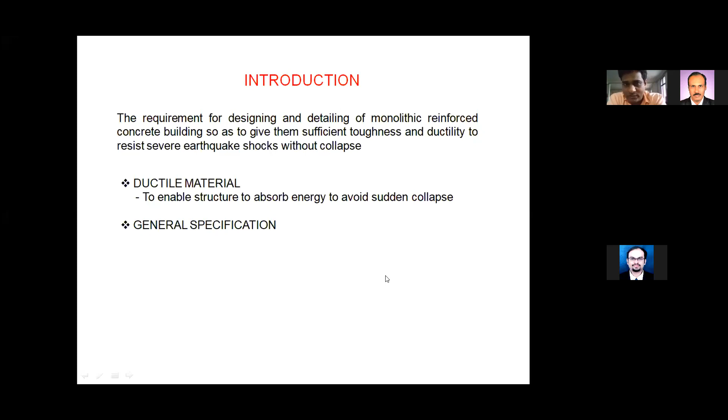Okay, so I will start now. So we have the general specifications that we use. For that we use IS 456 for the construction of RCC structures. Now we are moving to RCC structures which are subjected to earthquake load, seismic load, and wind loads. Hence IS 1893 deals with seismic forces and its effect and general guidelines for seismic provisions.

Why do we need the seismic codes? The requirement for designing these RC structures is to give them sufficient toughness and ductility to resist severe earthquake shocks without collapse. Because we are developing a structure which should resist the earthquake forces without collapse and which should sustain the forces and its impact. We have the materials in use for general construction.

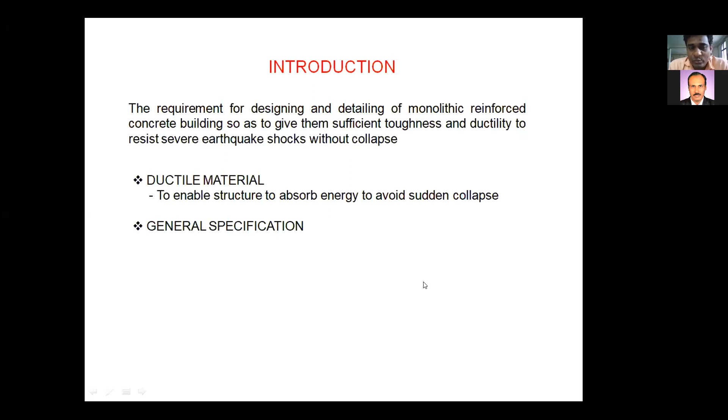We have concrete and steel. Concrete is sufficient to take the compressive forces, but it is a brittle material, and hence we use steel, that is the reinforcement, which is called a ductile material. So for tension we use steel, for compression we use concrete, and even for shear stresses, shear forces, to account for shear we use shear reinforcement. So all this plays a major role in ductile detailing, that is for the earthquake provisions.

Talking about IS 1893 revisions, the first IS 1893 was put forth in 1962, and IS 1893 gives the recommendations for the earthquake resistant design of structures. The first revision was made in 1966. The second revision of IS 1893 was in 1970, with some modifications and small changes made from the 1960s to 1970s IS code.

The third revision of this IS code was brought up in 1975, and the fourth revision, which we use for a longer duration, was in 1984. After 1984, the fifth revision was in 2002, based on some specific guidelines. The IS code, which was only one book from 1966 up to 1984, was then converted into 5 parts.

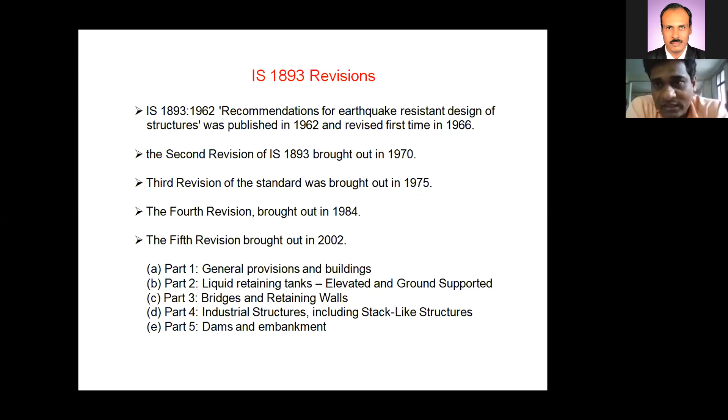This is for the general provisions, and it is applicable for building frames with 5% damping. IS 1893 mostly deals with RCC construction, but the 2016 IS code gives some guidelines for steel also, by considering a different damping ratio.

We know about earthquakes, we have heard about the Richter scale. The magnitude and intensity of an earthquake can be measured and defined by various scales. Out of these, there are minor earthquakes with less intensity, moderate earthquakes, and large earthquakes.

Minor earthquakes happen many times, but we do not feel the shaking. In moderate earthquakes, we can feel the shaking of the ground without structural damage occurring, and moderate earthquakes occur a number of times in the lifespan of the structure.

We know the general lifespan of a structure. For buildings, it is some 50 to 100 years. For dams, retaining walls, and bridges, it has the lifespan as specified by the codes. Some ancient bridges even last 150 to 200 years, while some RCC bridges last only 70 years, 50 years, and some collapse within 20 years.

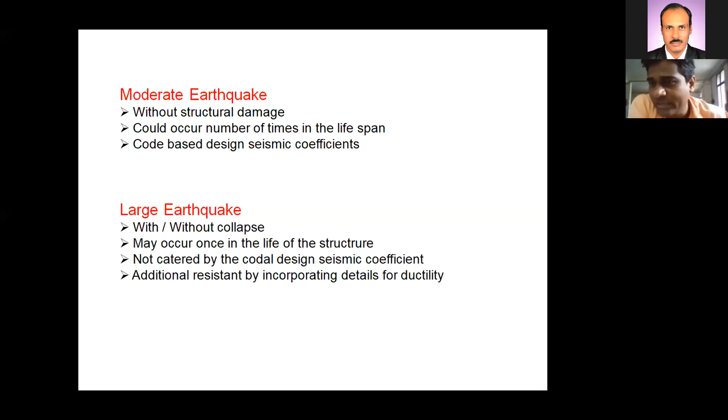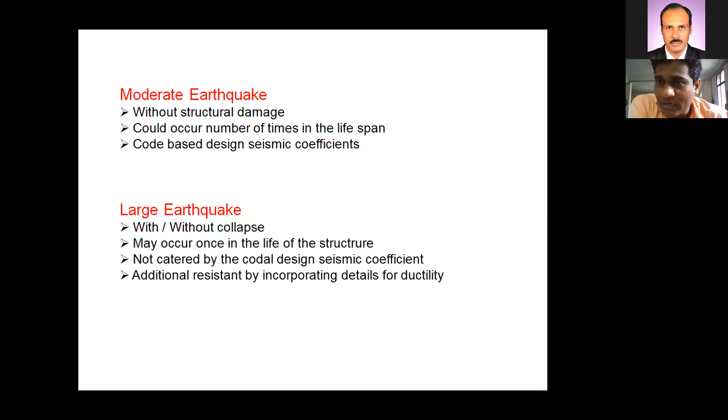Code-based design consists of seismic coefficients which are used for calculation of forces and reinforcement details. If we consider a large earthquake, it can cause structures to collapse or remain standing but with severe damage, whereas a moderate earthquake has less damage but a large earthquake can cause severe damage to structures.

A large earthquake occurs once in the life of a structure, not always. Large earthquakes are not catered for by codal provisions or seismic coefficients in design; instead, additional resistance is given through detailing for ductility as provided by the seismic codes. So we will have to consider moderate and large earthquakes for designing our regular structures, which include buildings, bridges, water tanks, retaining walls, etc.

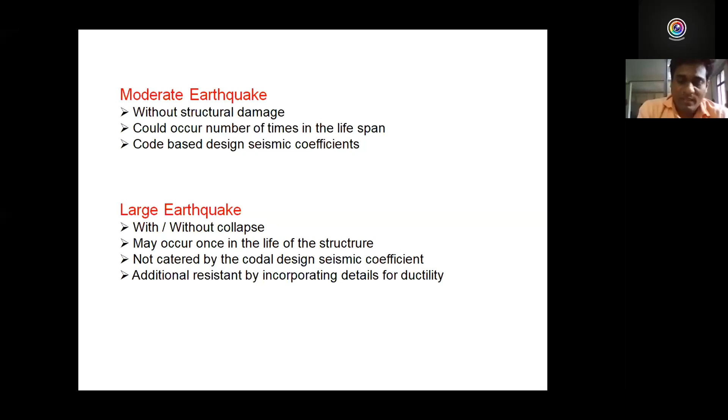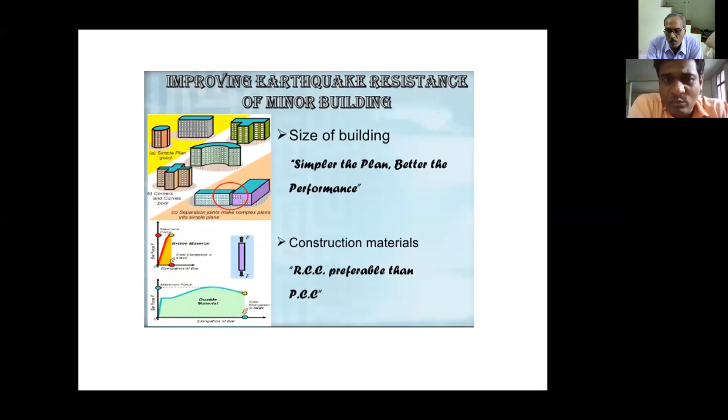While going for the construction of structures, we always prefer the simpler the plan, the better the performance. We go for regular, symmetric structures and avoid unsymmetrical structures due to torsional effects and eccentricity. To counterbalance excessive forces and moments, we go for a simpler plan for buildings. The figure shows some buildings with irregular shapes and some with regular shapes. We use two materials for construction: RCC, PCC, and steel.

What if the beams are strong and columns are weak? If beams are strong, they take the load from the slab and, having greater depth, the self weight of the beam increases, transferring this load to the column as a reaction. If columns are weak, the reaction coming from the beam will not be sustained by the column, leading to failure in compression and sometimes shear. Hence, a weak column is not preferred.

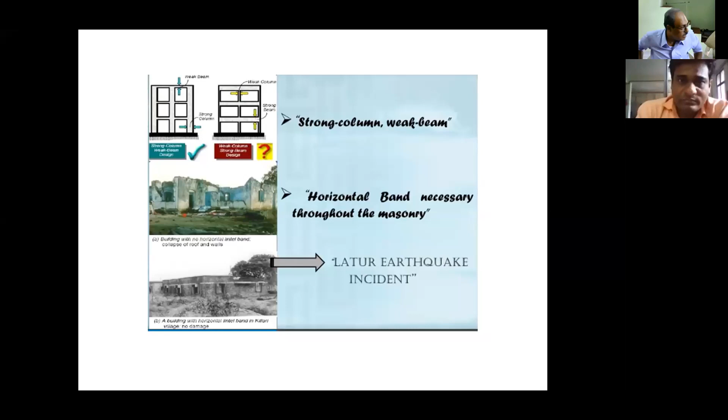In the Bhuj earthquake, the soft story effect was observed, and hence the codal provisions were made in terms of soft story and weak story. Specific definitions for soft story and weak story were given in the IS code, and again in IS 2016 rather than 2002, the definitions of soft story and weak story were slightly changed, which we will discuss.

Provision of shear walls along the periphery, along the direction of earthquake forces, are prepared. These are used to counterbalance the effect and provide greater stiffness to the wall. These shear walls are deep beam reinforced walls, and they are to be provided along the periphery, along the symmetrical part of the building, along different axes.

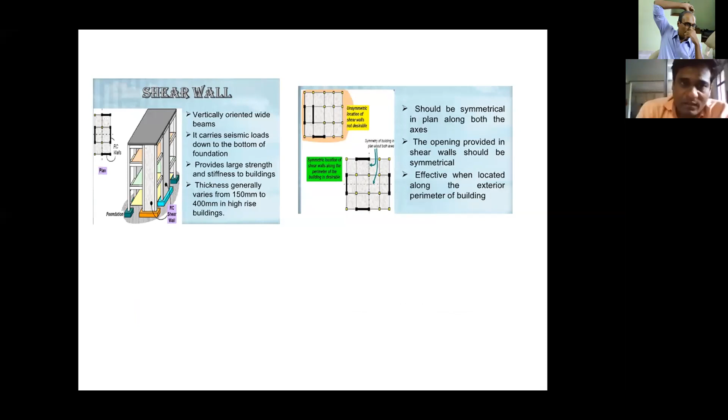Base isolation is one of the techniques to counteract earthquake forces. It introduces flexibility in the structure to counterbalance the impact, shocks, and vibrations. These are some figures which give us a clue for going for different seismic codal provisions and to use different devices. Base isolation is one of these devices.

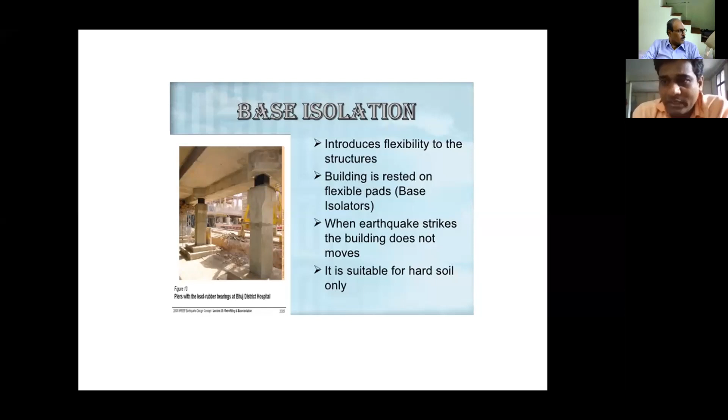Again, there are some dampers. Dampers are used to absorb shock, so they're called shock absorbers. Dampers are of various types: viscous dampers, friction dampers, yielding dampers, and viscoelastic dampers. Depending on the type, there are also lead rubber dampers.

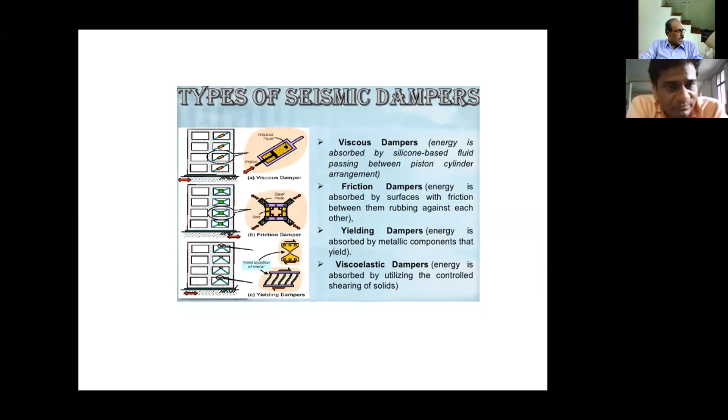So all this was the basic background to go for the detailing. Now we have the members: flexure members, and members which act for shear. We have the beam as a flexure member and the column as the compression member. Beam and column comprise the structural frame, so combination of beams and columns in a proper arrangement leads to the structure, which is the building frame.

For designing the frame, we use the member as a flexure member for the beams. Why is it called a flexure member? Because it carries the bending moment. The beam is in flexure at the center where the maximum load occurs, and at the support it is to be designed for shear.

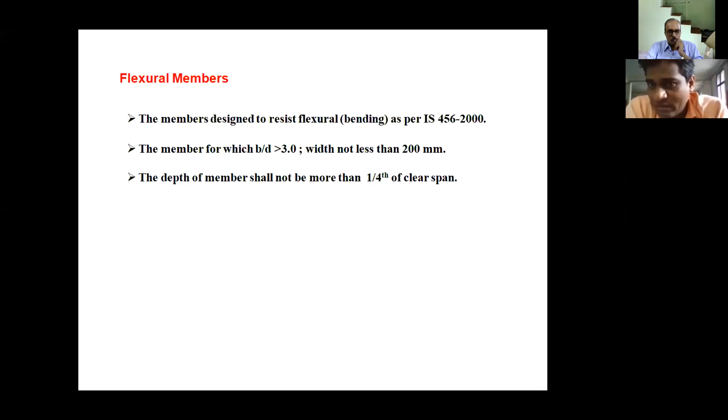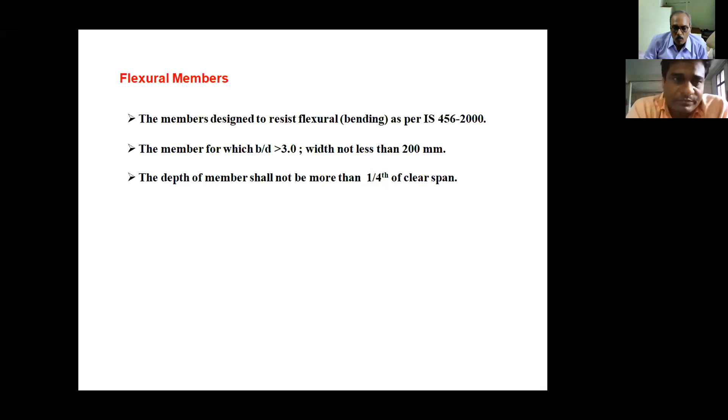The bending or flexure members are to be designed as per IS 456, but detailed detailing is to be carried out as per the codes of the earthquake, that is the special confined reinforcement. For members where the width to depth ratio is greater than 3 and width not less than 200mm, the width and depth criteria for the beam are also revised. It should not be less than 200mm or the thickness of the wall, and the depth of the member shall not be more than 1/4 of the clear span for the flexure member.

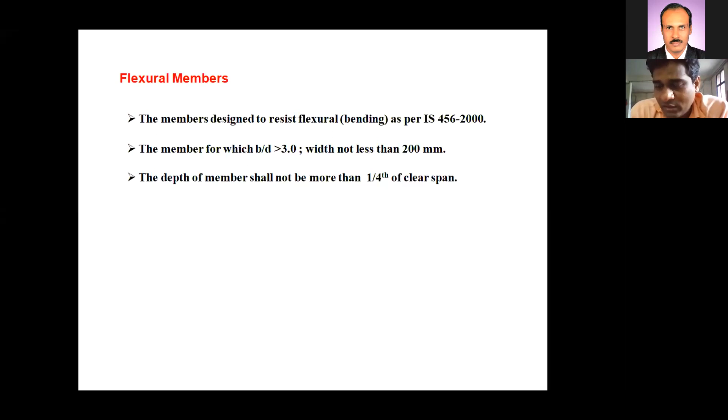And hence it again gives the deep beam criteria for small depth. We have the reinforcements which are called longitudinal reinforcement and stirrups for shear.

For longitudinal reinforcement, these are used for resisting bending cracks. The top and bottom reinforcement shall consist of at least 2 bars throughout the member length, and it depends on the moment and shear how many bars are to be provided along the longitudinal direction, that is the longitudinal reinforcement.

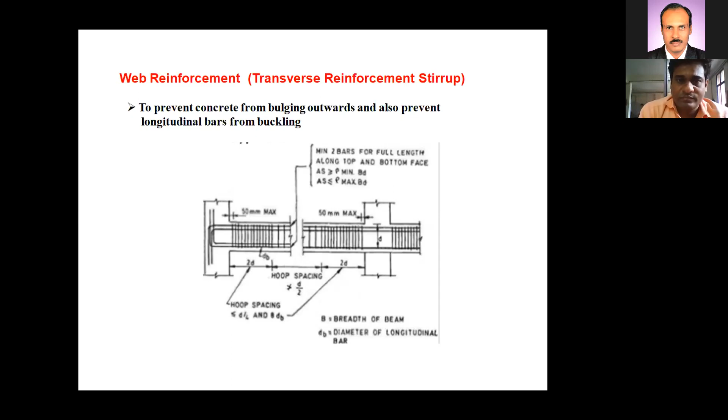Transverse reinforcement for another type of structure - beam column joints. The development lengths are shown here. At the center of the column, confinement of reinforcement is to be provided at some distance. At the junction of beam column, confinement of reinforcement is provided, and the reinforcement spacing increases as we go away from the beam column junction.

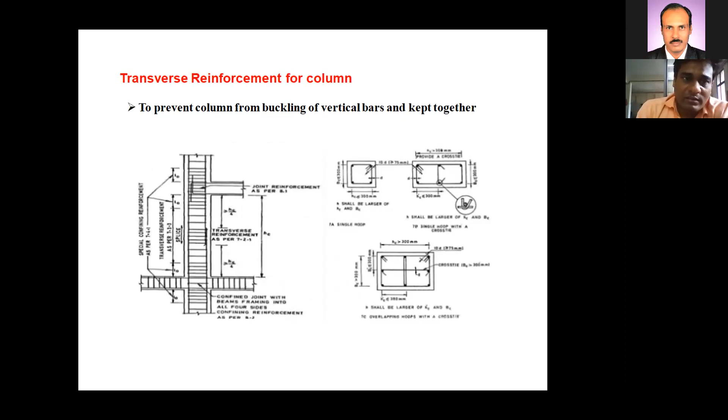Now specifically given by IS 1893. In conjunction with IS 1893, I will talk about some codal provisions of 13920 also to understand, because both are specific codes and both have a correlation in terms of the confinement of reinforcement.

The minimum dimension of the column shall not be less than 20 times DB, where DB is the diameter of the largest longitudinal reinforcement in the beam, or it should be 300 mm. So we are not allowed to go less than 300 mm for the dimension of the column.

Minimum column width should be greater than or equal to 300 mm, or it should be greater than or equal to 20 times the diameter of the bar. If we are using a bar of 20 mm diameter, 20 into 20. If we are using a 16 mm diameter bar, 20 into 16.

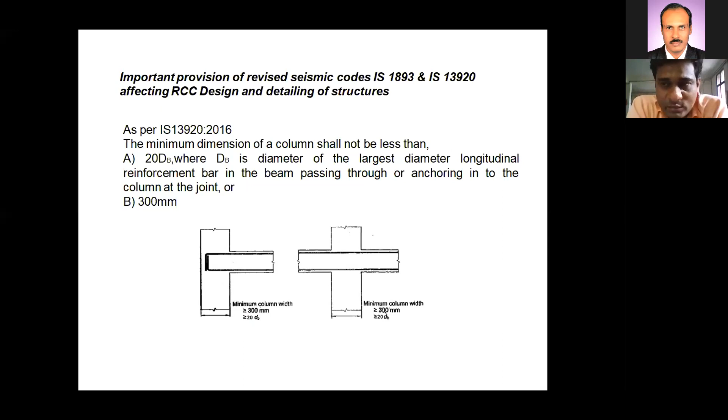So the dimension of the column, as per the rule, is 20 times the diameter or 300 mm, whichever is greater.

As per IS 13920 also, the calculation of shear force capacity should not consider the contribution of bent up bars, links, and the concrete RC section separately, but the calculation should be based on proper shear force capacity. No deduction shall be made because of bent up bars. That is the provision, because many times we deduct the dimension by using bent up bars and go for less reinforcement, which is not provided by the IS code.

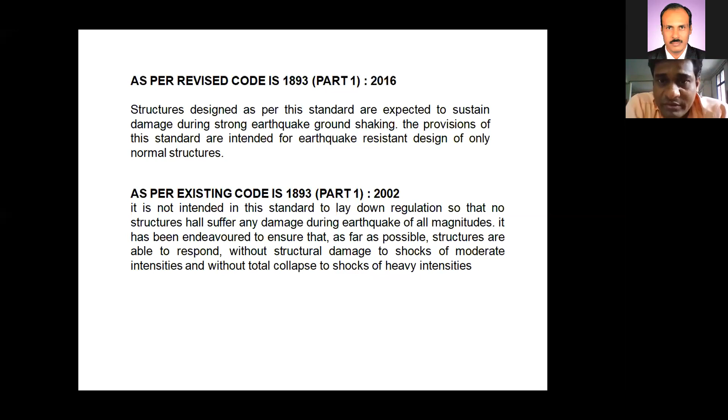We have the previous IS code of 2002 and the latest of 2016 for general guidelines on building frames and earthquake criteria. Structures designed as per these standards are expected to sustain damage during a strong earthquake, meaning a structure should be built in such a way that it sustains the damage and should not collapse. That is the criteria of IS 2016, which was not intended in the IS 2002 code.

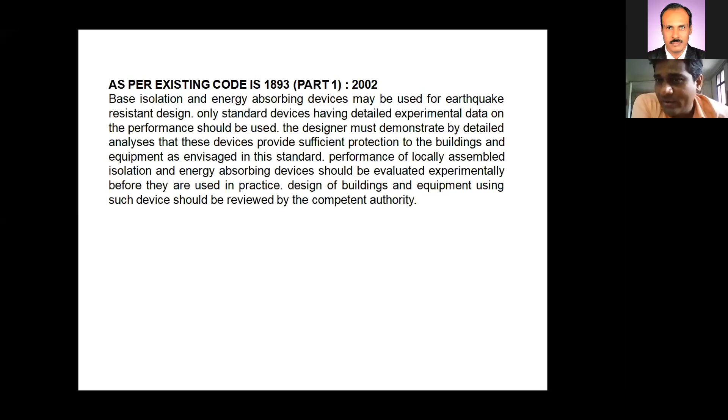The drawbacks of IS 1893-2002 are improved in 2016, and some guidelines are revised in the 2016 IS code compared to the previous IS code.

The map of the seismic zone, given in the prior IS code, in the first or second IS code, divided the zones into 5 parts: zone 1, 2, 3, 4, 5. Later, zone 1 and 2 were merged, and it started from zone 2, 3, 4, and 5. For these zones, the zone factors are specified.

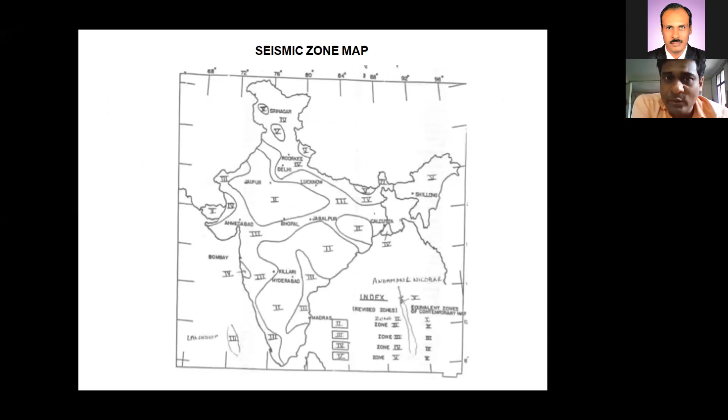So this is the old seismic zone map, and from old to new, we have come to this new seismic zone map, which gives the seismic zones at different parts of India. These seismic zones are divided into 4 parts: zone 2, 3, 4, and 5.

All these zones have some specified intensity of earthquake. Zone 2 has the 6th intensity, whereas zone 4 and 5 have intensity greater than 8 and 9. Hence the seismic zone factor Z is represented for different zones, starting from 0.1 to 0.36. We take the zone factor in calculation of AH, the horizontal seismic coefficient.

In the previous IS code, emphasis was given only on calculating the horizontal seismic coefficient. In the revised IS code, both horizontal and vertical seismic coefficients are given prime importance, and not only EQX and EQY, but the 3-dimensional EQ, that is EL, earthquake load, is to be calculated as given by the codal provisions. This incorporation is in the latest IS code of 2016, which was not emphasized in the IS code of 2002. Now we know the formula for AH, the horizontal seismic coefficient.

What is the horizontal seismic coefficient? It is a coefficient required to find the base shear. The formula for base shear is VB static equals AH into W. AH is the seismic coefficient, and W is the seismic weight of the building.

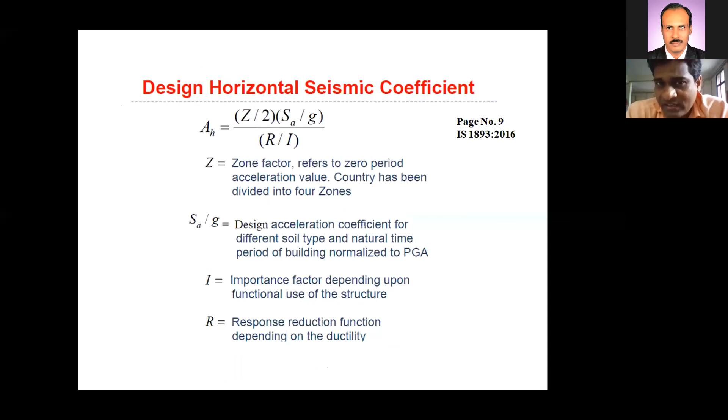For liquid storage tank, the formula is a little changed. For bridges and covered bridges, it is different. Piers, abutments, this is different. For industrial structures, it is different. So this formula is to be considered for designing the vertical acceleration coefficient for the vertical motion.

And where this vertical motion occurs, this occurs on the setback type of building, step back type of building, where the vertical sloping ground is available.

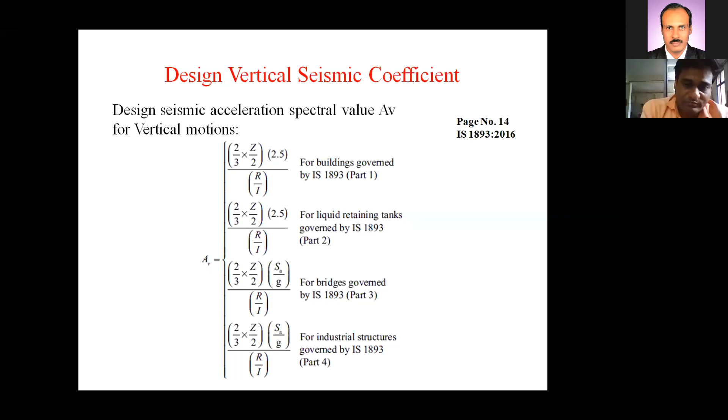SA by G ratio is given for different types of soil, and it depends on the time period. And how to calculate time period, that is also given by the codal provision. Hence SA by G for different types of soil and for response spectrum method is given by the formula in page number 9 of IS 1893.

Generally, for hard soil, we will take it as 2.5, and also if T lies between 0.4 to 4, we will calculate T. T depends on the planar dimension, height, and the base width. We will see how to calculate T. After calculating T, we will find SA by G, and we will put this SA by G value in the formula of AH.

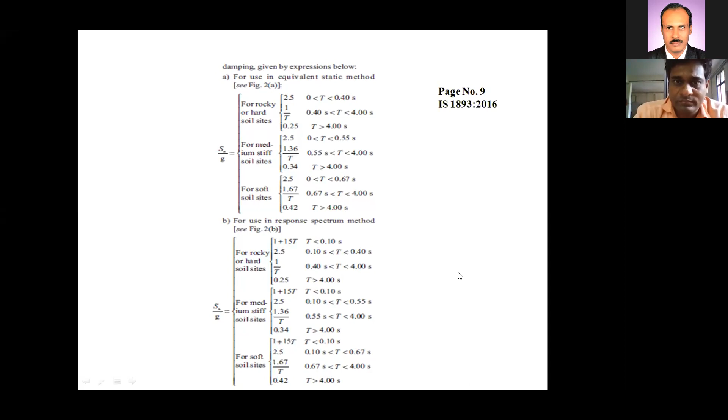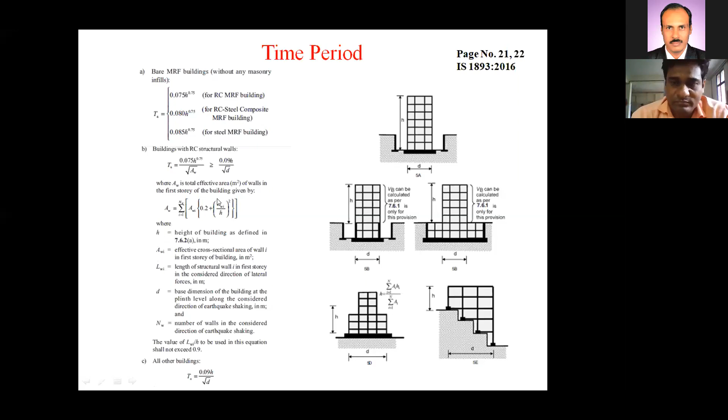So there are some irregularities of the building. We know these irregularities, that is the plan irregularity, stiffness, and mass irregularity.

For plan irregularity, if the building is not symmetric about both axes, x and y, we will call it plan irregularity. L type of building, T type of building, T-shaped building, this comes under plan irregularity. Unsymmetrical arrangement of the shear wall also leads to plan irregularity.

Then we have stiffness and mass irregularity. Stiffness at different floors of the building changing leads to stiffness irregularity. The arrangement of different masses, that is the structural masses, leads to mass irregularity.

We have vertical irregularity also: sloping ground, step back building. Base width is different for some floors, and width is different at some top floors of the building.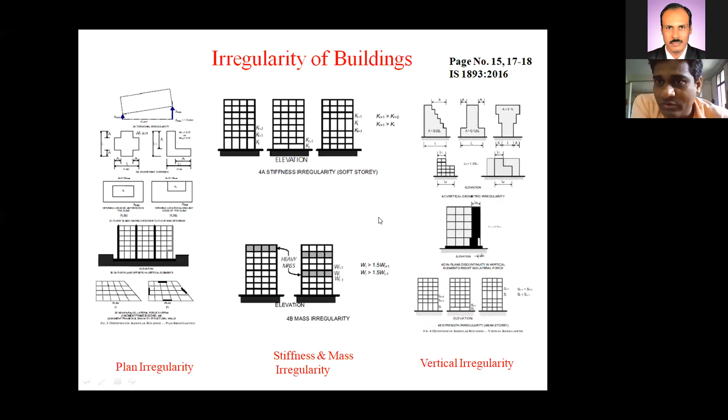That is the vertical irregularity. It comprises the arrangement of different structural elements along the vertical position, which leads to vertical irregularity. All these are given in IS 1893, page numbers 15, 16, 17 and 18. These irregularities are to be considered while calculating the seismic forces, while doing ductile detailing, and for the arrangement of the different structural elements. And all this depends on the stiffness criteria.

Now we will move to the codal provision as per IS 1893 Part 1, known for the general specification for building frames. Using IS 1893 Part 1, we calculate the base shear, that is the lateral force or horizontal force, and this QI is to be calculated per story or per floor along different directions, X and Y. So we will have VBX, VBY, QIX and QIY, as we calculate in our MTech engineering structure curriculum. Now for this, the formula is the same.

QI is given by VB. Suppose we are calculating static, so QI equals VB static times WI HI square upon summation of WI HI square. WI is the weight of the individual floor, starting from top to bottom. HI is the height at that floor, and summation of WI HI square means summation over the entire building, which leads to QI multiplied with VB.

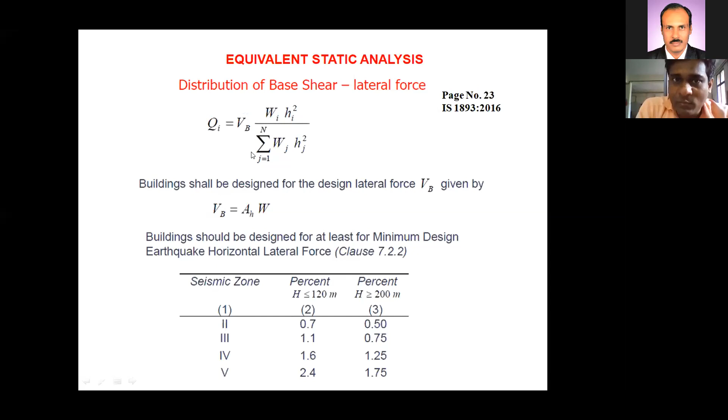Now in the response spectrum method, we will have the modal analysis. We have VB, we have AH, we have the height of the building, and we will have the modal participation factor Pk, phi I whole square. In static, we have the formula QI equals VB times WI HI square divided by summation WI HI square, for static. For dynamic, we have the formula PK equals summation of WI phi I, upon summation of WI phi I square.

From this we will calculate the lateral force Qi, and that Qi will be Ak into phi I, Pk into Wi, where Ak is the design horizontal acceleration spectrum using the natural period of vibration mode for different modes 1, 2, 3, 4. We will have phi I, the mode shape coefficient for the ith floor and kth mode. So if we have 4 floors, we get floor 1 mode 1, floor 1 mode 2, floor 1 mode 3, floor 1 mode 4, floor 2 mode 1, floor 2 mode 2, floor 2 mode 3, floor 2 mode 4, and likewise. And Pk will be calculated.

From this we will form a table, and in tabular form we will calculate these factors, and from this we will calculate the Qi. As we calculated Qi static, we will calculate the Qi for dynamic, that is Qi for each mode k. The seismic weight will be calculated as the total weight of the building at each floor.

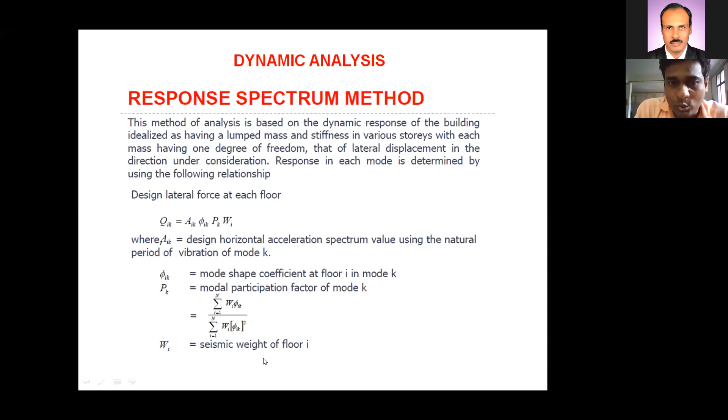Now we will use the method.

There are two methods for finding the value of lambda: the square root of sum of the squares, that is SRSS method, and the absolute sum method.

For finding out the peak quantity lambda due to all the modes, lambda equals to the square root of summation of lambda k whole square, where lambda k is the absolute value of the quantity in the kth mode for different modes, but we will take the kth mode value for that. And r is the number of modes being considered. If you are considering 4 modes, the value of r will be 4, and that will be the summation from the 1st, 2nd, 3rd, and 4th mode.

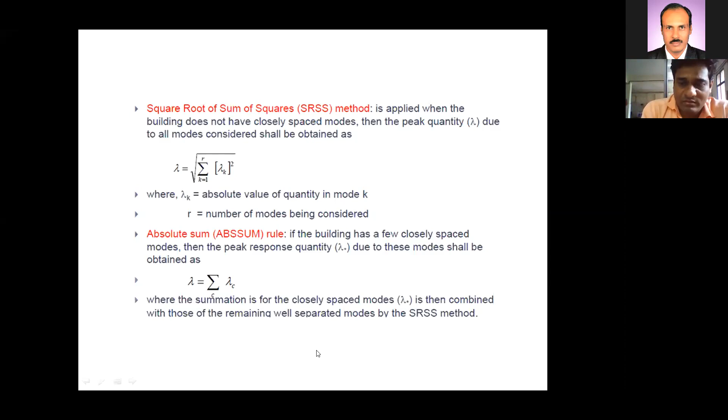The codal provisions.

In the previous IS code, there were importance factors given as 1.5 and 1. Now, as per the new IS code, the importance factor for buildings is given as 1.5, 1.2, and 1. So this value 1.2 is added here.

If we consider the previous IS code, IS 1893-2002, there were two importance factors, 1.5 and 1. 1.5 was for important service and community buildings such as hospitals and schools, so the importance factor was 1.5, and due to this the ratio was increased by 0.5 times. For general buildings, the factor is 1.

Now, as per the 2016 IS code, the factor has been changed from 1 to 1.2 for those buildings which are residential and commercial buildings, or structures with occupancy more than 200. Otherwise, we could have taken it as 1. So instead of 1, it is 1.2.

It is not that much important, but we are not considering 1.5 for it. So for important buildings we consider 1.5, for less important but capacity more than 200 we consider 1.2, and for other buildings it is 1. This is the provision as per the 2016 IS code, changed from the previous IS code.

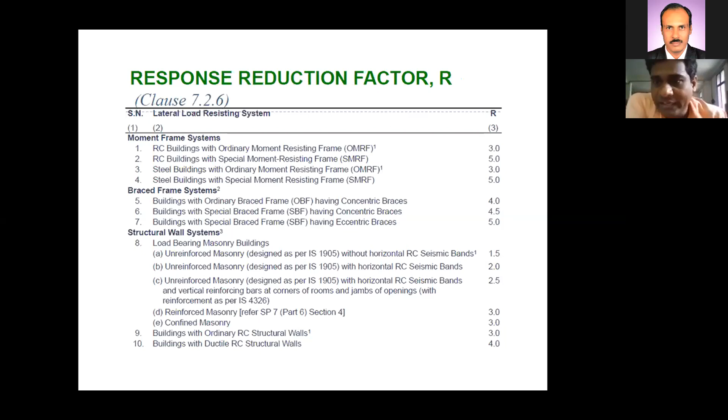So this is the classification for R depending on the importance of our building, its use criteria, and different structural elements. We will use the value of R accordingly.

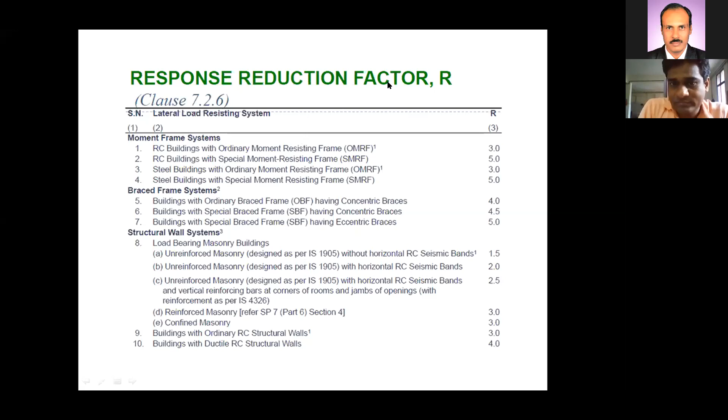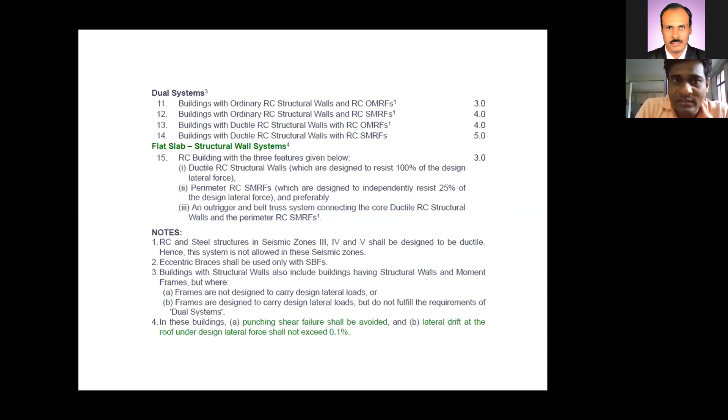For a dual system, it again changes from 3 to 5. If it is a building having a flat slab, the value of R should be taken as 3.

A change can sometimes be called a major change. The change from IS code 1893 of 2002 to IS 1893 of 2016 is that the time period, which was considered as 4 seconds in the previous codal provision, is now changed to 6 seconds. Hence the spectra for the equivalent static method has been converted from the limit of period of 4 seconds to 6 seconds for the natural period.

Now for these, we have three types of soil. For the SA by G ratio, that is the design acceleration coefficient used in calculation of AH, which equals Z by 2, I by R, multiplied with SA by G. We have seen Z, I, and R: Z is the zone factor at 0.16 and 0.24, I is the importance factor, and R is the response reduction factor. And then we have another factor, SA by G.

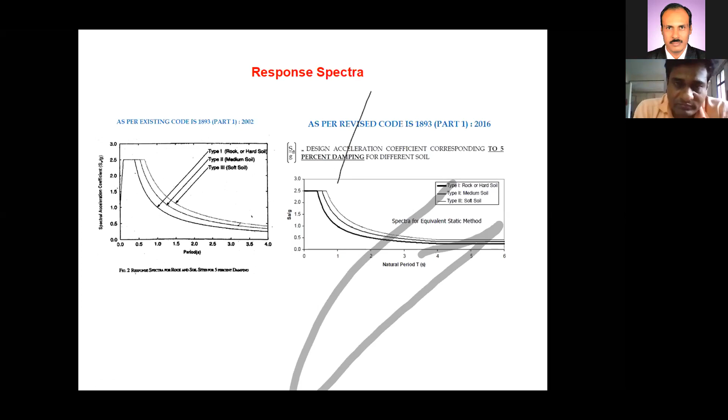Now we will see how the soils are classified. We have rock or hard soil, medium or stiff soil, and soft soil. For this type of soil classification, determining the percentage increase in net bearing pressure and skin friction is given by the codal provisions.

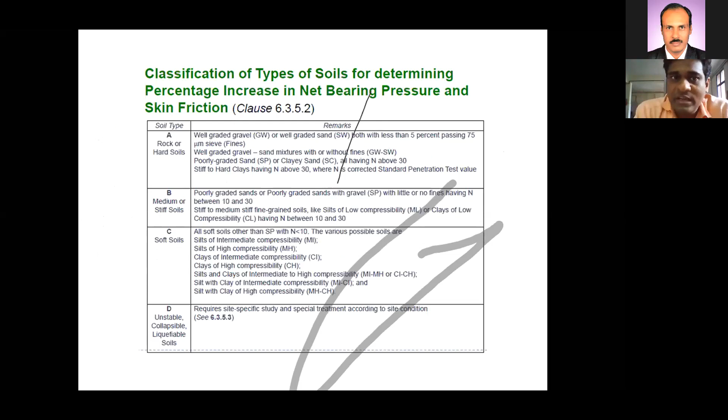For this, we have well-graded gravel or well-graded sand, both with less than 5% passing the 75 micron sieve, that is called fines. Well-graded gravel is considered under rock or hard soil. Now if we have medium or stiff soil, it is called poorly graded sand or poorly graded sand with gravel having no fines, for which the N value lies between 10 to 30.

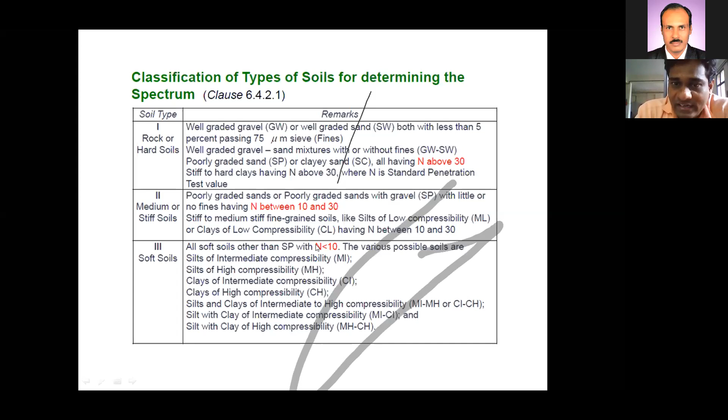For soft soil, N is less than 10. We will have values of N depending on the desirable minimum corrected field value for different zones. If you are in zone 2, for depth below ground up to 5 meters, the value of N should be taken as 10 to 20. For different zones like 3, 4, and 5, if you excavate the ground up to 5 or equal to 10 meters, the value of N should be taken as 15 to 25. From this, we classify our soil as soft soil, hard soil, or clay.

Percentage increase in the allowable pressure should be 50 for rock and hard soil, 25 for medium stiff soil, and for soft soil, no increase is allowable.

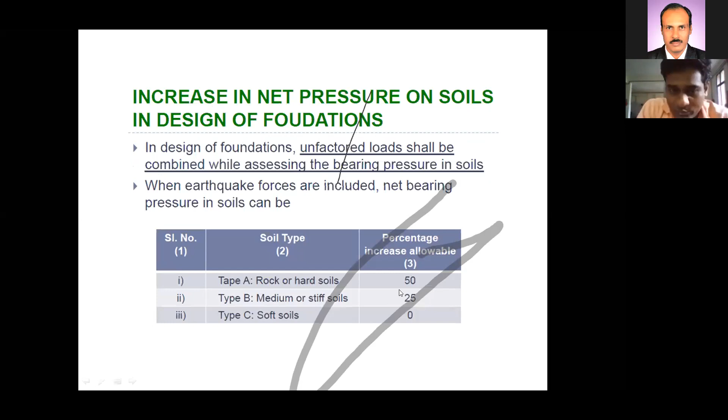Codal design philosophy is given by equivalent ductility and the behavior factor with equal elastic and inelastic deformation, because we have both elastic and inelastic deformation, and both are to be considered for the ductility and behavior factors.

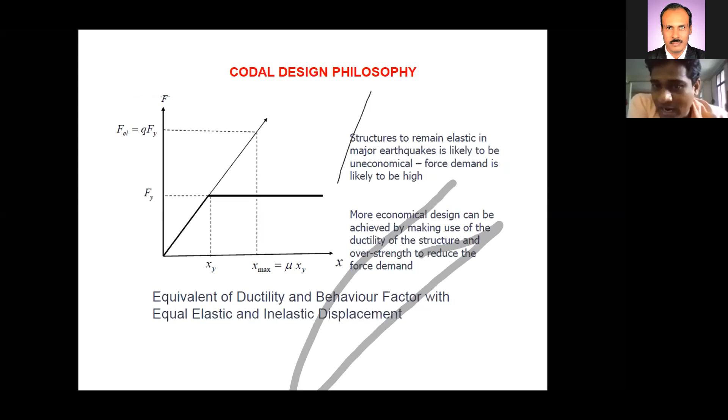Now we have the load combination. Up to now we have calculated the seismic forces, the earthquake loads, considering two orthogonal directions, x and y. If we take the x direction earthquake force, we will have to take full earthquake force in x direction plus 30% in y direction. Hence the load combination can be taken as: full earthquake load in x direction, that is ELX plus minus 0.3 ELY. Why 0.3? Because it is the 30% contribution of the other orthogonal direction with full consideration of one orthogonal direction.

So predominant earthquake in x direction, 30% in y direction should be considered, hence the formula becomes ELX plus minus 0.3 ELY. If we consider y direction as predominant, ELY plus minus 0.3 ELX, 30% in the other orthogonal direction. If our main direction is y, then full, that is 100% in y direction, and 0.3 means 30% in ELX. So these two combinations with plus minus will lead to 4 combinations.

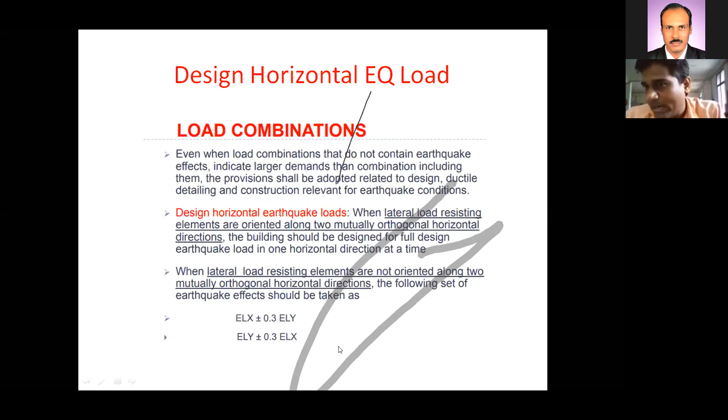Now another combination for dead load and live load. For general construction, we take the first combination as 1.5 dead load plus live load. Now for earthquake shaking, we will consider 1.2 times dead load plus IL.

We will cover the live load, imposed load, that is live load, plus minus ELX plus minus 0.3 ELY, for x direction. Now if you consider for y direction, same formula, but y contribution will be 100% and x contribution will be 30%. So there are these four types of combinations leading to one set of 4, and again 4 more combinations. So all these are the different load combinations, and we will design for the maximum load combination, that is the combination which gives the maximum load.

Now these were for the horizontal loads in x and y direction, ELX, ELY, both in the planar dimension along x and y. But what about the vertical EQ effect? EQX is x direction, EQY is y direction. For EQZ, we call it the design vertical earthquake effects, in the z direction. Why do vertical effects need to be considered? Because it needs to be considered for some important types of structures.

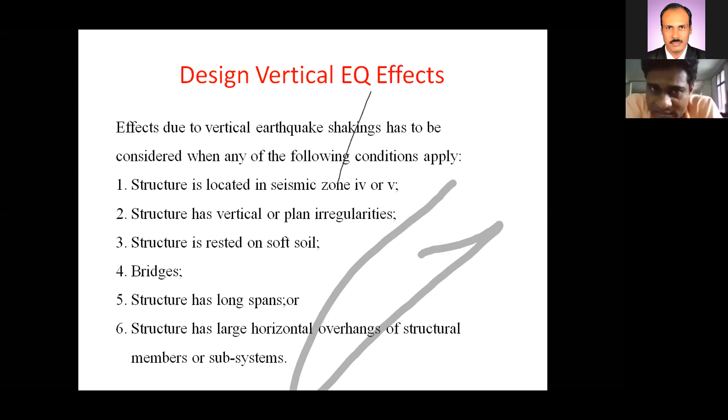Likewise, the horizontal seismic coefficient and horizontal seismic effects in EQX and EQY direction, we have considered only X and Y: 100% X direction then 30% Y, or 100% in Y direction then 30% X. In the same way, for 3D earthquake ground shaking with X, Y, and Z, we convert the formula as 100% X, 30% in Y and Z, that is ELX plus minus 0.3 ELY plus minus 0.3 ELZ.

The formula has changed from only X and Y to now X, Y, and Z orientation. X is one direction, Y is orthogonal to X direction, and Z is the height along the building, that is the depth. These are the different combinations for the 3D ground shaking, which is to be considered as a worst case for building frames lying in zone 4 or 5, for bridges, and for long span structures. Hence our final EL will be under root of ELX whole square plus ELY whole square plus ELZ whole square, as per the combination given in IS 1893/2016 codal provisions.

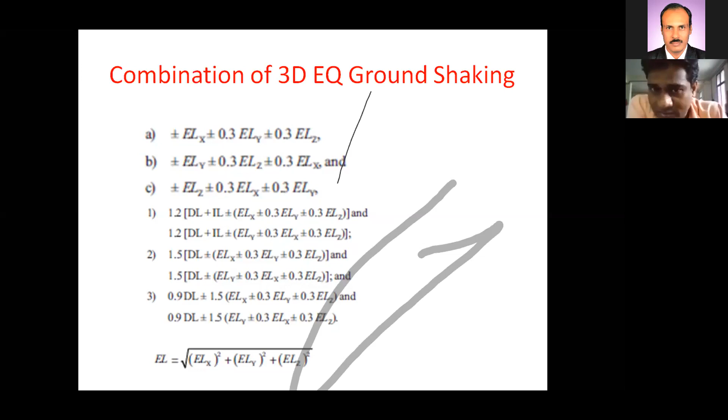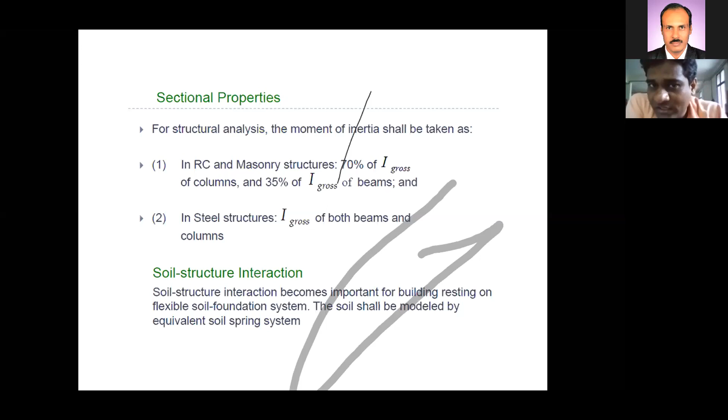Soil structure interaction becomes important for buildings resting on flexible soil, and hence it is to be considered with the sectional properties. For foundation, as per settlement and failure of the strata, for different zones, different corrected values are to be taken.

The definition of soft story irregularity has changed slightly. In the previous IS code, a soft story is termed as one in which lateral stiffness is less than 70% of that of the story above it, or less than 80% of the average lateral stiffness of the 3 stories above. Now it is changed from 70 to 60%, and from 80 to 70%. If you read the sentence, you will understand the meaning.

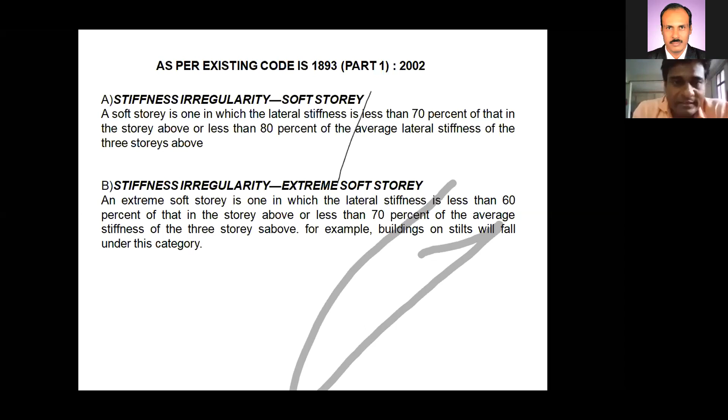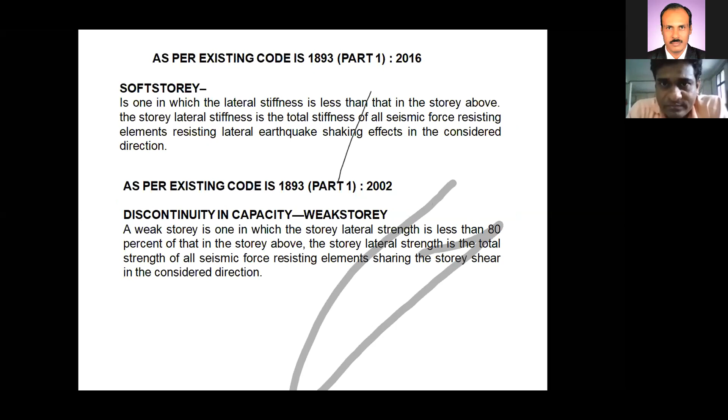Like soft story, the definition of weak story is also slightly changed. As per IS 2002 definition, there is a little change for these weak and soft stories. In a simple way, the story which is weaker than the story above it or below it is termed as the weak story.

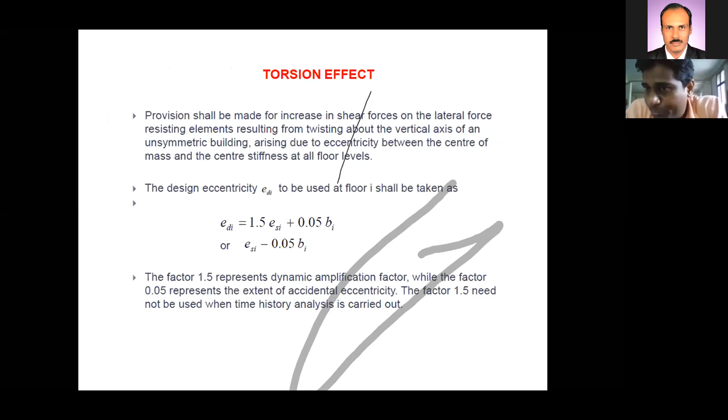Torsional effect is to be considered, and for design eccentricity, EDI for the ith floor shall be taken as EDI equals to 1.5 times ESI plus 0.05 BI, or ESI minus 0.05 BI. That is the width and eccentricity contributes to the equivalent eccentricity, and hence we have the moment equals to P into E, that is the total load into eccentricity.

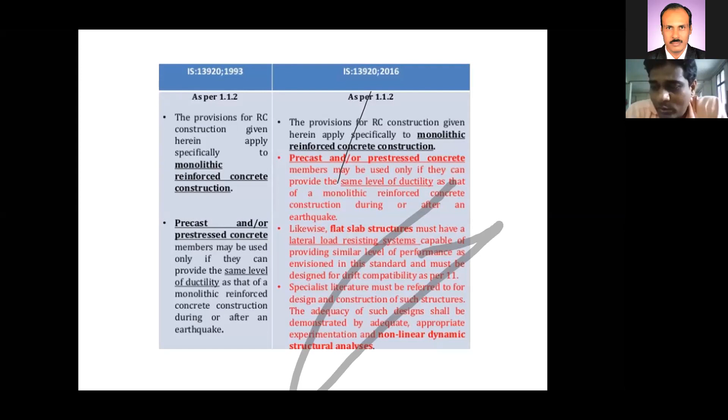Some guidelines of IS 13920 are also incorporated in this presentation, because for detailing and design both these IS codes rely on each other for specific provisions. But I will not go into IS 13920 because tomorrow Professor sir will focus on IS 13920. This will be covered tomorrow.

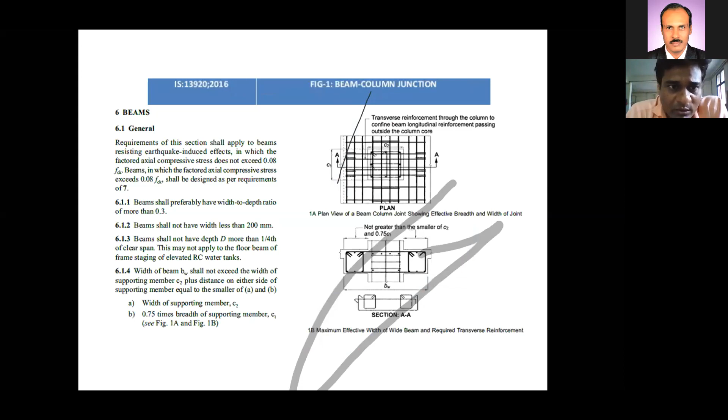Now, talking about IS 1893, what are the major changes incorporated from the 2002 IS code to the 2016 IS code? The first which was seen, the basic, is the design spectra, which was up to 4 seconds previously; now it is up to 6 seconds of the natural period. That is given for 3 different types of soil. We have seen both spectra for SA by G ratio. Now, the same design spectra corresponding to 5% damping are specified for all buildings, irrespective of the material, because if you are taking a steel building, there are some different types of damping.

Damping in RC buildings and steel buildings is different. But if the steel building has 5% damping, the same formula can be used.

The intermediate importance category of building, for the density of occupancy incorporated, had the value of importance factor as 1.2, because in the previous IS code only 1.5 and 1 were there. Now the factors are 1.5, 1.2 and 1, so 1.2 is included. Now the building is designed for at least minimum lateral force.

Now here we are considering EQX, then Y, and we are considering the 3-dimensional effect X, Y and Z, and the combination of this.

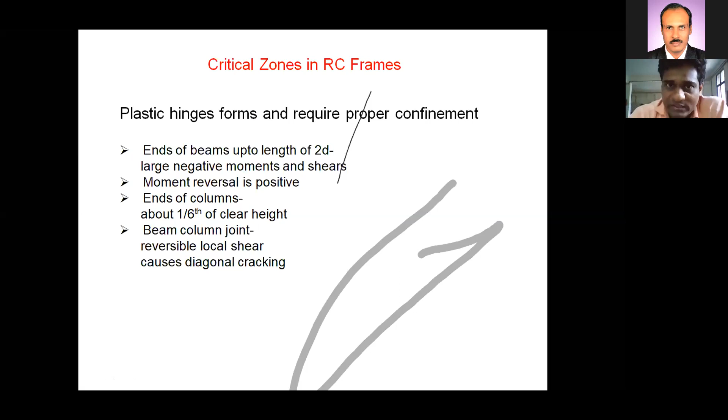At the end of the beams, up to a length of 2D, large negative moments and shears occur, with moment reversal being positive. At the end of the column, over 1/6 of the clear height, and at the beam column joint, reversible local shear causes diagonal cracking. All these are to be incorporated when considering the plastic moment for plastic hinge formation, or for considering the plastic moments for the critical zones of the RC frames.

Detailing of the beam - general guidelines. Now I have given some guidelines here for the confinement of the reinforcement.

Minimum compression steel shall be greater than 0.5 of Ast. Generally at the end of the slab we take 0.5 of the Ast, but it should not go beyond or be lesser than that 0.5.

That is the guideline: minimum 2 bars throughout the beam at top and bottom. Full bond length - development length plus 10 times diameter of bar - should be available. Splice near the quarter span, that is 50%, should be provided, and the lap length LD is to be calculated.

Confined within stirrups, spacing about 150 mm. Web width should be greater than 200 mm - it should not be less than 200 mm as specified by the IS code.

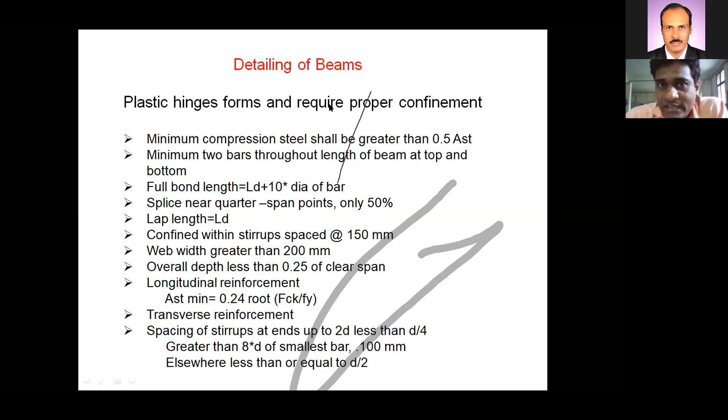Some diagrams are shown here. These are not exactly from the IS code or exactly required for this, but some diagrams are shown here on how to avoid cracking and how to provide the reinforcement.

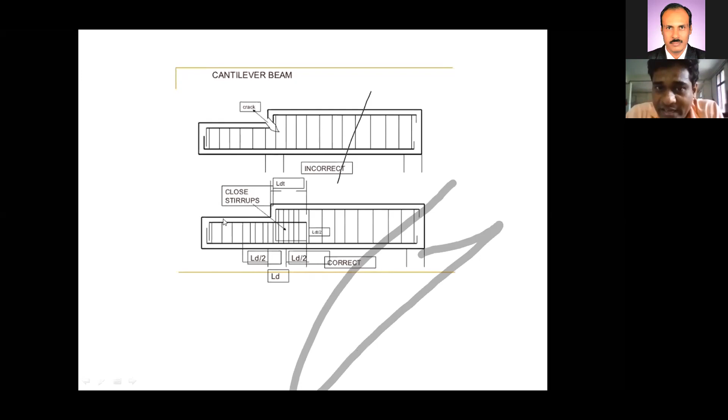In the bottom figure, continuity of reinforcement is maintained here. Now the continuous reinforcement at the top side, at the top of this beam, which enters this area LDT, will avoid the crack.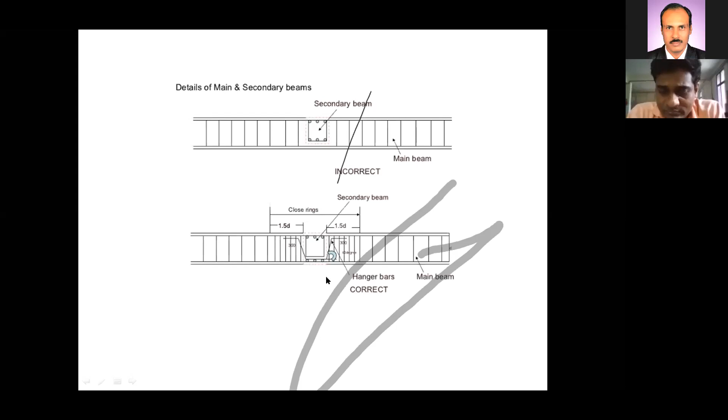Again, some different types of detailing which we generally do. We provide this type of detailing in our drawings, but these are not necessarily to be adopted exactly by the bar binders at the actual site. But some examples are given here showing how to provide the development length, up to how much distance, and how the arrangement should be.

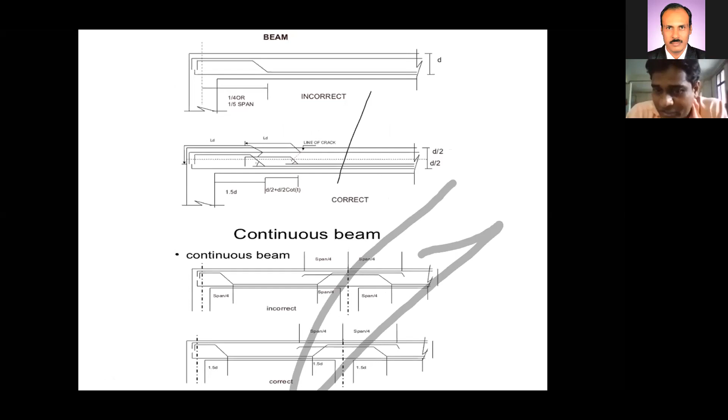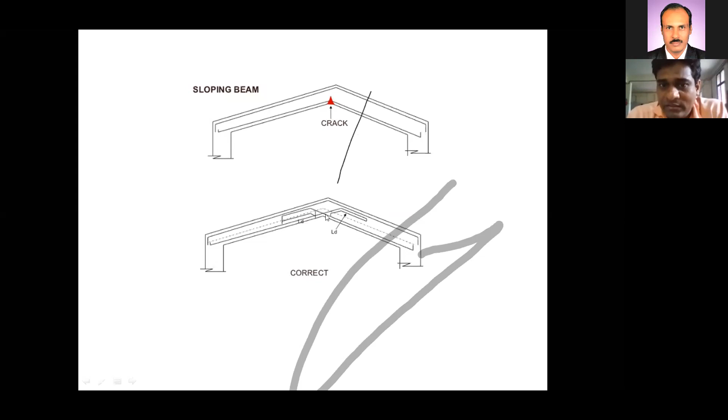Sloping beams - to avoid the crack at the corner junction, provide the bars up to this point and then bend it at this point, thus avoiding failure at this junction due to unavailability of reinforcement.

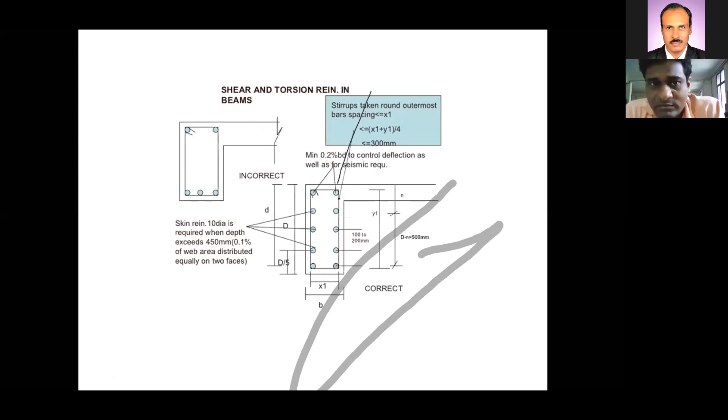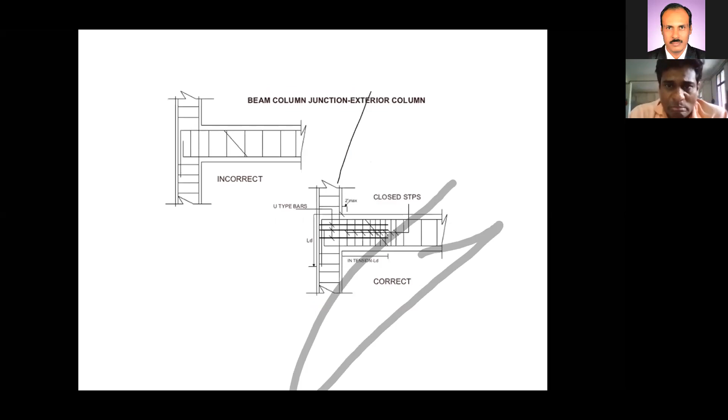So this type of detailing will account for vibrational forces.

So I will stop here. I have almost taken 1 hour for the talk on IS 1893 Part 1. I have covered the different formulae of VB static and VB dynamic, along with the codal provisions incorporated in IS 2016, depending on the addition of vertical acceleration coefficients and irregularities, then the Sa/g ratio for a time span of 6 seconds. These were the new introductions in this IS code. And now I will conclude my session here. If you have any question, then you can ask me.

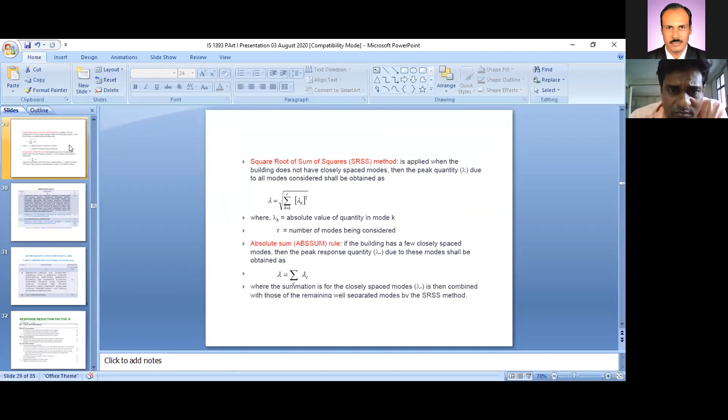Let me see the formula. Yes. You change the type of soil. You take different data. You will definitely get a different SA by G value than 2.5. Just change your data. Many times you will get the value 2.5, but if you change the data of your problem, go for a different type of soil, or incorporate a shear wall, you will get a different SA by G value.

Even sometimes we observe that the value of AH also does not change for many types of problems. So if you want a different value, change the data of your problem and you will definitely get different values. Is there any other question?

So there is a question from Satyajit Patil, sir: how is the response reduction factor R calculated? Response reduction factor.

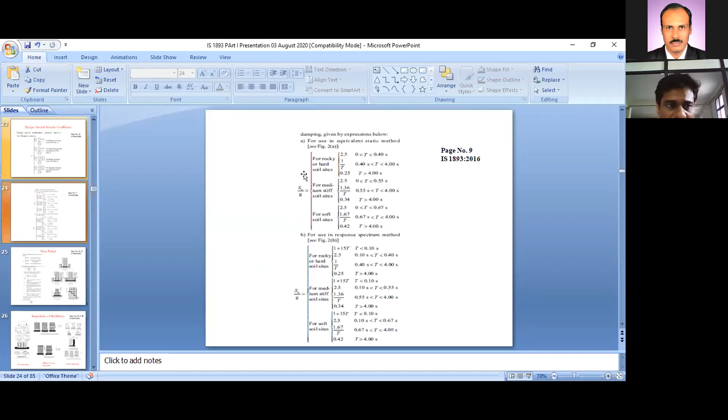So the response reduction factor depends on ductility. The ductility behavior of the structure decides the response, and hence the response during earthquakes should be reduced by this value so as to get realistic behavior. Otherwise, the structure will be too stiff and will not respond according to the earthquake shaking, that is, the ground motion, and hence it is incorporated.

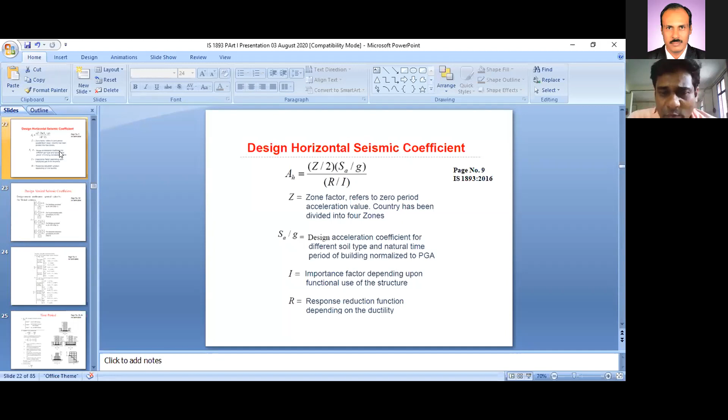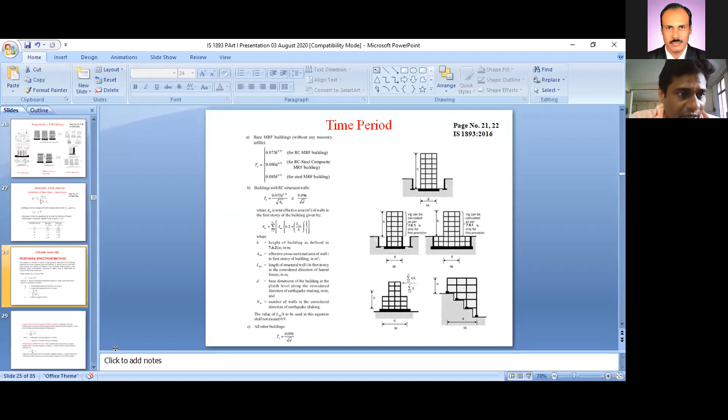Now, the response reduction factor is calculated depending on this reduction in ductility. So I don't have its exact formula, but the proper description is given in the IS code. Let me see if we have incorporated the response factor. Let me go there.

Is there any IS codal provision which will govern the cross-sectional increase or decrease of the building with respect to height? I mean to say ductility change.

In Indian standard codes, we have specified codes. Previously, we had IS 456 2000 for general RCC construction, where only dead load and live load were considered. When the concern of earthquake came up in previous years, IS 1893 was incorporated.

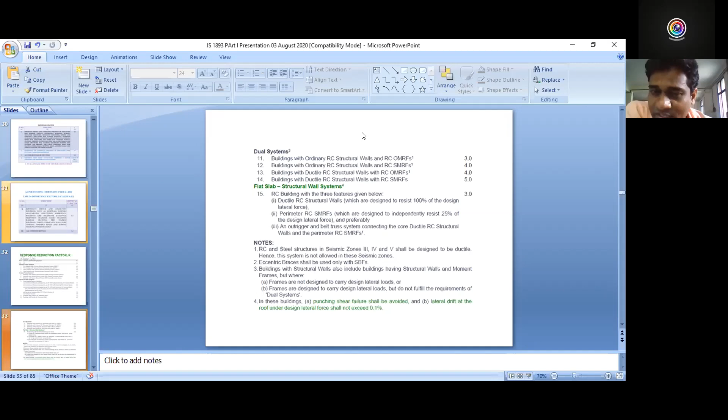For wind effect, we are considering IS 875. For earthquake, we are considering IS 1893 and IS 13920. So we are using all 2-3 types of IS codes at the same time, taking guidelines from these 2-3 IS codes together, and designing our structure based on these combined guidelines and criteria.

But there is no such single IS code that covers one building and one type of parameters in a unified manner. So that is not the case at present.

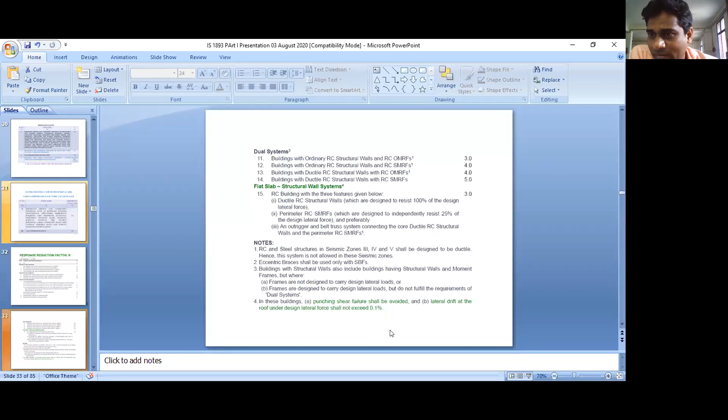Tomorrow I will take one review of this session and address the questions. I will give answers to all the questions, and then tomorrow I will talk on soil structure interaction, which is one part of these codal provisions, and how to consider it in the actual analysis of building frames. That is what we will move to in tomorrow's lecture.